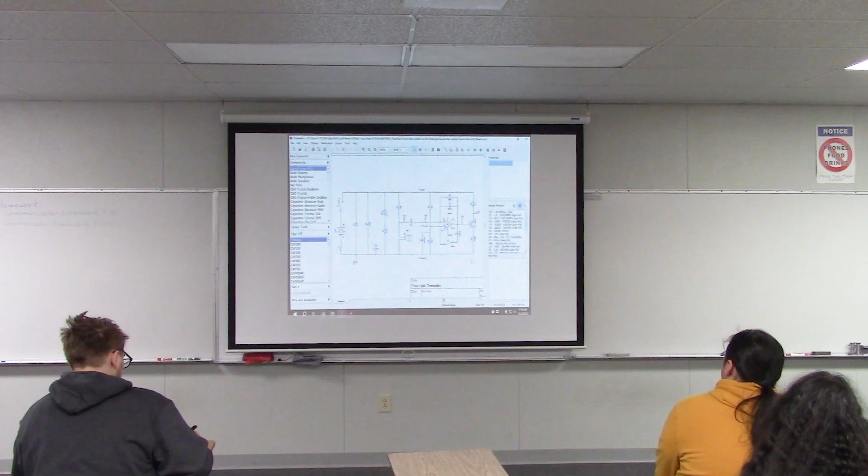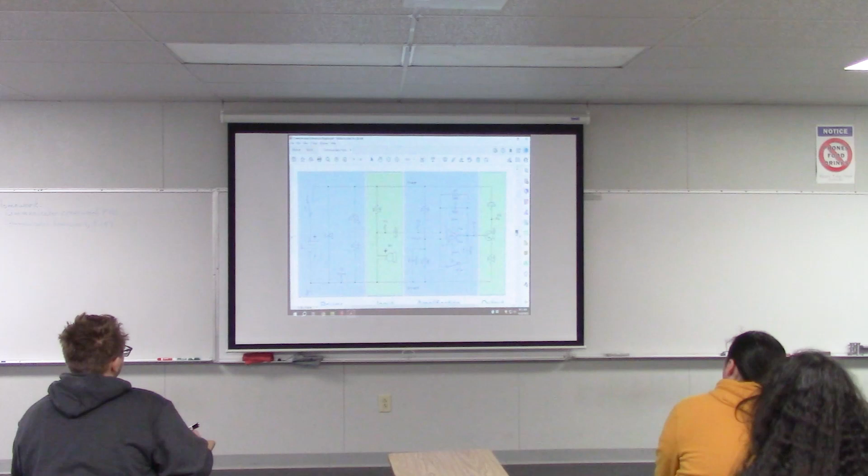So let's look at this. Let's break this down into stages. So this is the same circuit, but now it has been separated into stages. Okay, so you can see that there are 4 main stages here. And if we break them down like this, hopefully it's a little bit clearer what's going on. So we have the power stage, the input stage, the amplification stage, and the output stage. So we'll just do kind of a quick overview of each one, and then we'll dive in and see how each one works a little bit more.

Okay? So the power stage, oh, there you go. If you get them too close together, they have a little feedback there.

The power stage provides power for the whole circuit. The input stage takes the stimulus from the outside world and turns it into an electrical signal. The amplification stage takes a small electrical signal and makes it bigger. And then the output stage takes that electrical signal and turns it into some other type of signal or energy that is leaving the board. In this case, it turns it into light, which shines down the fiber optic cable and ends up at the other board. So this board really has these 4 different sections. The circuit has these 4 different sections that work together in order to achieve its goal.

So does that kind of make sense, how we break it down? All right, so then let's take a look at each one of these sections with a little bit more depth, a little bit more detail to understand how it works. Let's start with the power stage. So the power stage has this component over here. What do you suppose that component is? Yeah, the power supply, and in this case, what's providing the power for this device? Battery. The battery, exactly. So this is the battery over here.

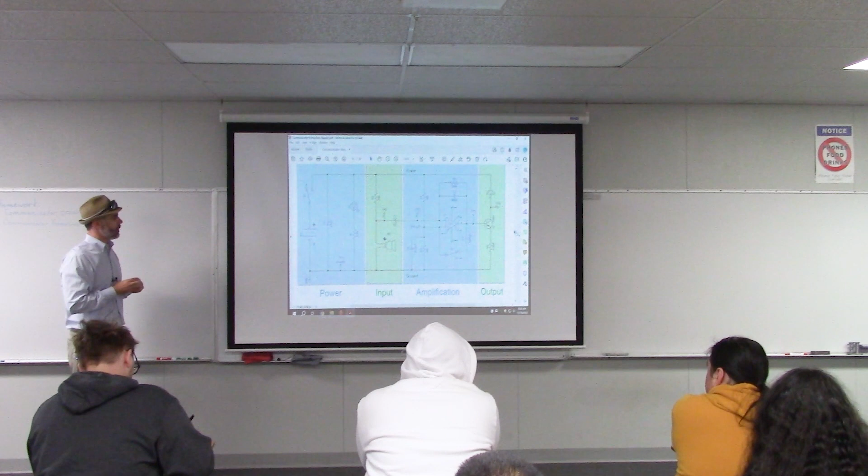So that's the power stage, and next up we have the input stage here. So the input stage, like I said, takes the stimulus from the outside world and turns it into an electrical signal. So in this case, the stimulus is sound. We're speaking into the microphone, and we'd like to turn that sound into an electrical signal.

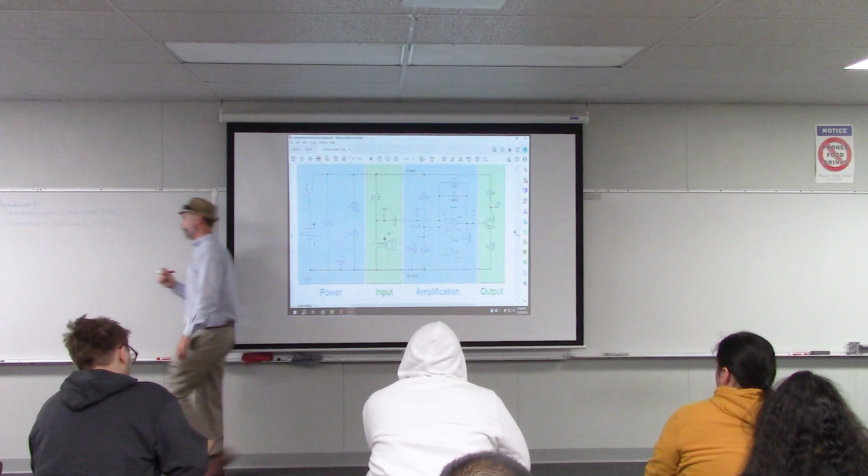So the way that this works is that this microphone acts kind of like a variable resistor. And when we speak into the microphone, the louder the sound is that hits the microphone, the more that resistance changes. So we can see that that microphone is in series with another resistor. So what we have is one fixed resistor up here, which is 20 kiloohms. And then we have the microphone down here, which acts like a variable resistor.

What's its range of resistance? It centers around about 20 kiloohms, and then it goes maybe between, say, 18 and 22 kiloohms, something like that. So let's say that this top part is connected to the 9-volt wire up here, sometimes called a rail. So we have 9 volts at the top, and then this bottom part is connected to the ground rail down at the bottom. So that is at ground. Say that both of these resistors were at 20 kiloohms. What voltage would we have right here in the middle?

Well, so what was another name for a circuit that had two resistors in series like this? A voltage divider, exactly. And we call it a voltage divider because it divides the voltage. And if both of the resistors are the same value, they each get half of the total voltage. So we've got 9 volts total, so what's half of that? 4.5, exactly. So the voltage in the middle would be about 4.5 volts.

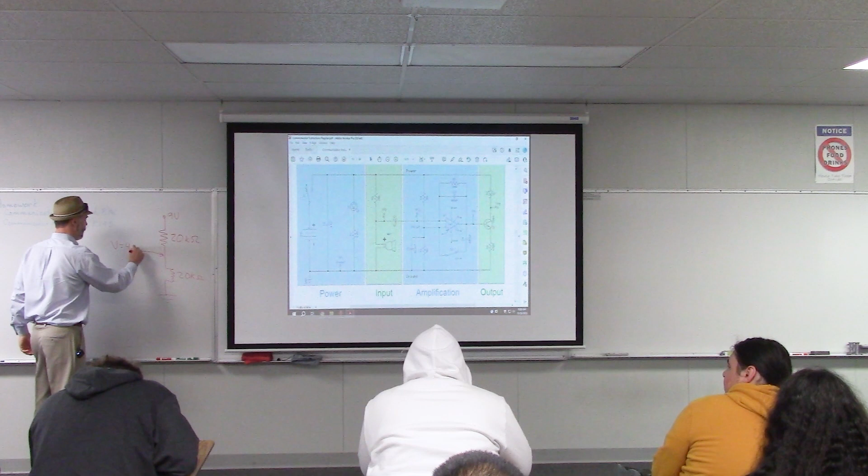Wouldn't the voltage also be in a range? Because that's variable. Well, right, exactly. So if this was at exactly 20K, then the voltage would be at 4.5. But if this goes slightly above 20 kiloohms, like you said, it causes this voltage to go up a little bit. And if this goes below 20 kiloohms, it causes this voltage to go down.

And that's exactly how we turn the sound signal into an electrical signal. As we speak, we cause this resistance to shift up and down, and that causes the voltage to shift up and down as well. And so that turns sound into a voltage signal. And that's the signal that we get right here at this point, which is right between those two components. So does that make sense? So that's how we are able to turn the sound signal into a voltage signal.

So in this scenario, is 20 kiloohms for the variable resistor like the sound system being off? Like nothing's being sent through? Right. When no sound is hitting the microphone, this voltage is at just a steady 4.5 volts. Okay, then what is the difference in speaking that makes it go down or up? Is it certain frequencies of your voice, or how loud? Like if you're being really quiet, does it go down? Right. So that's a great question.

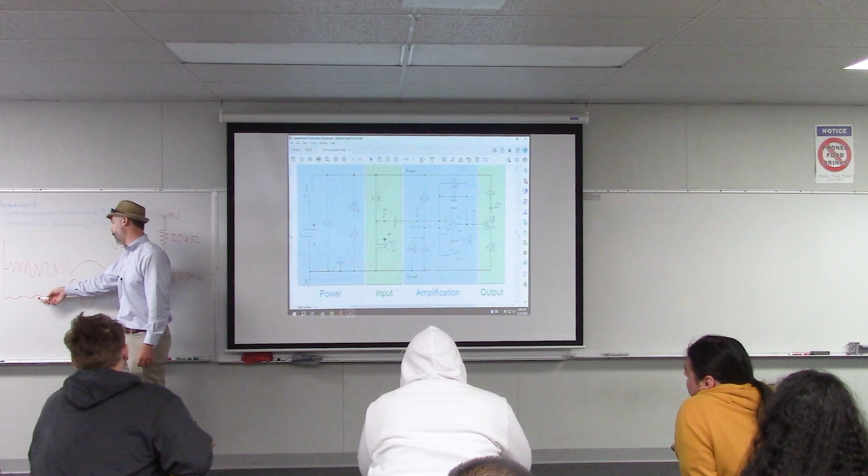So where's the 4.5 divided in that area, in theory? Because something has to be cut out, right? Some level of loudness or frequency has to not be picked up. Is that right? Well, okay, so what happens is that we have a voltage that changes over time, and it is centered around 4.5 volts.

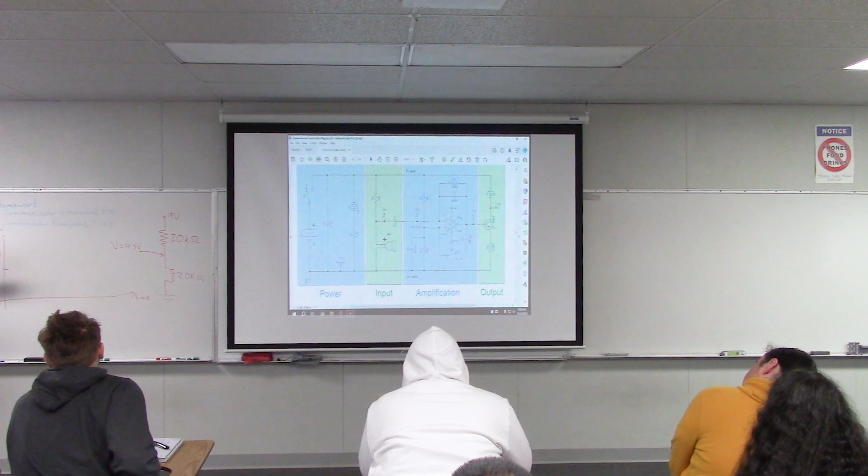So when no sound is hitting this microphone, we would see just a constant signal at 4.5 volts. When a quiet sound starts to hit it, we would see the signal go up and down a little bit. And then when a loud sound hits it, the signal might go up and down more, like that. Okay.

And that's why we have the signal centered at 4.5 volts. If we had it centered at 0 volts and we were trying to record signals, we'd get maybe the top part of the signal, but half of it would be cut off. So we have it centered right in the middle of our voltage range so that we can get the high pressure and the low pressure parts.

And then it kind of has like invisible dotted lines where the top and the bottom of what it can pick up is, right? Like the 22 and the 18K resistor levels. Right. So I'm making this bigger so that it's easier to see, but that's a good point.

The signal coming out of this microphone is actually very, very small. So if we said that this is 9 volts up here and this is ground and that's 4.5 in the middle, then the signal coming out of the microphone might be mostly constant, and then it might go up and down a little bit, and that might be a big signal. Smaller signals you couldn't even see. It's very small. It looks almost like a straight line, and we can see this when you build your board.

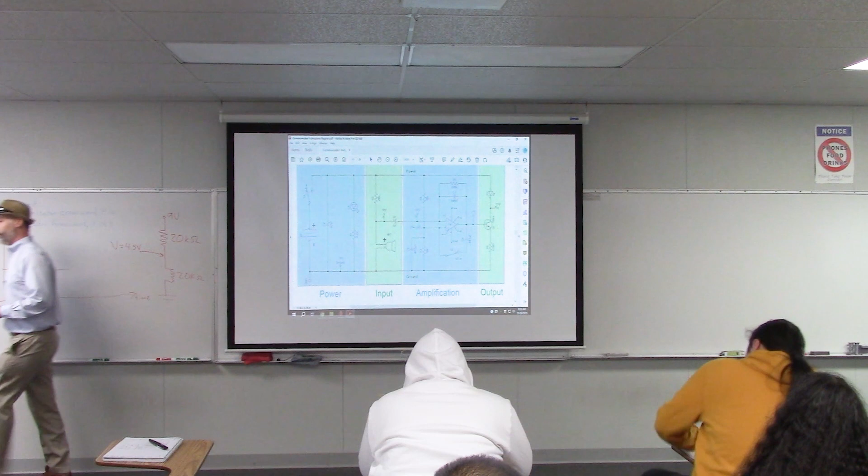You'll notice that at a number of different points on this board, there are these little things labeled TP. TP stands for test point. Those are points where you can hook up your oscilloscope and actually measure the signal. There's a test point right here between the microphone and the resistor, so you can measure the signal at that point to see what it looks like. I recommend that you do that after you build your board.

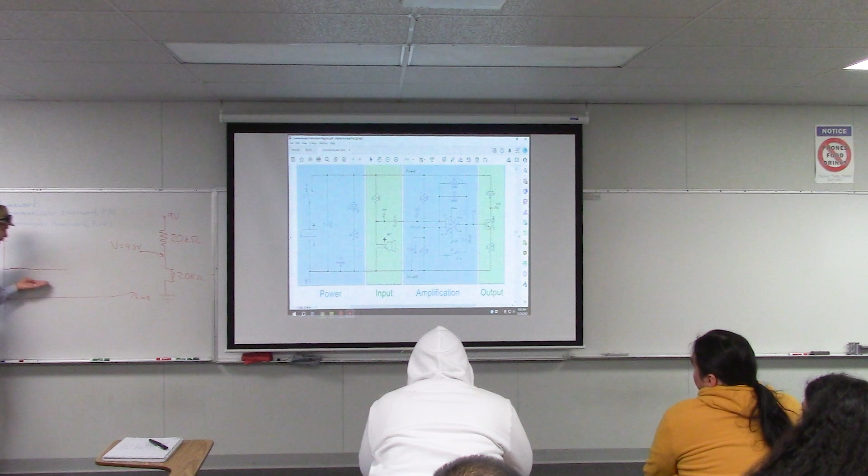So anyway, this is how we create the electrical signal from the sound, and this is what the signal might look like. But as I said, this is a very small signal. It's not really big enough to do anything useful. So the next thing that we want to do is make it bigger. But actually, before we get there, there's one more thing, and that's this capacitor here.

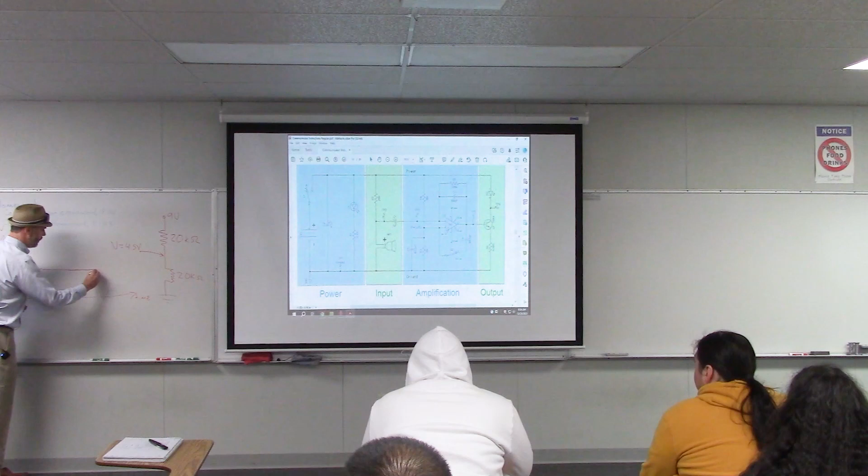Capacitors allow high-frequency signals to pass through them, but they block out or absorb lower frequency signals. The reason for that is because, like I said, when there is no sound hitting this microphone, the voltage is constant at 4.5 volts. We don't really care exactly what the voltage level is at that point. All we really care about are these little variations in the voltage, because those little variations are the sound.

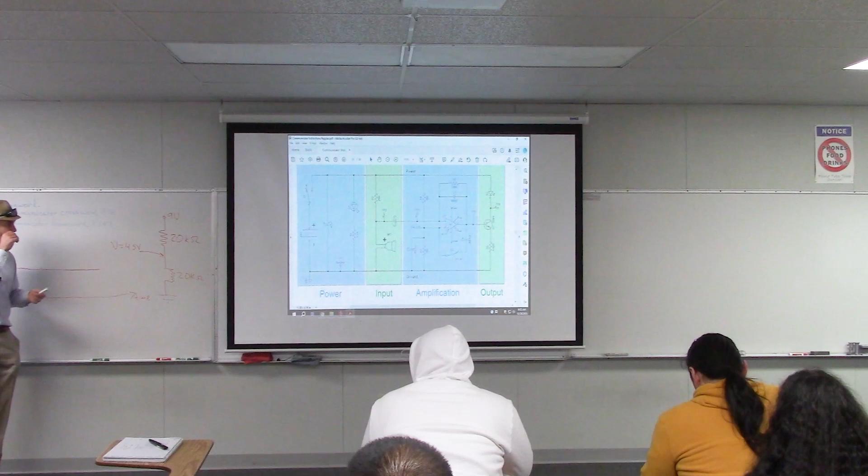A constant signal that doesn't change has the lowest frequency of all. We say that a constant signal has a frequency of 0 hertz. It never changes. So if we want to get rid of that constant, unchanging part of the signal, we can use a capacitor because it blocks out low frequency signals. This capacitor allows the high frequency sound signal to get through, but blocks that low frequency constant signal we don't care about. So that's what that capacitor is for.

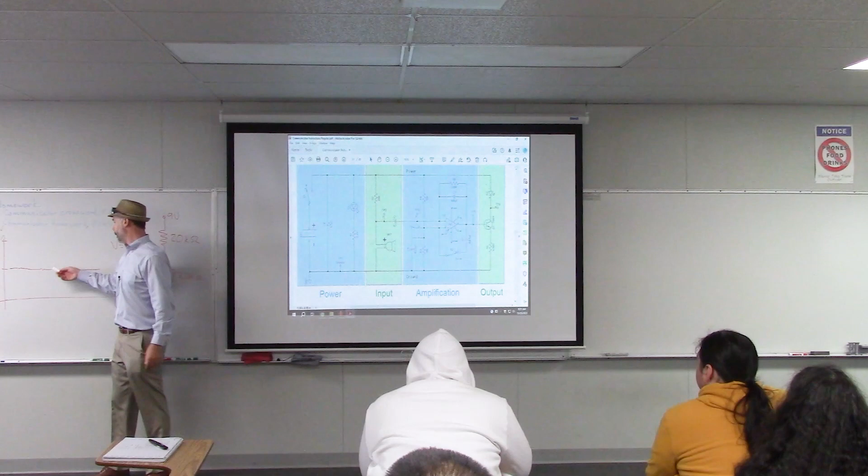All right, so then we go on to the amplification stage to take that small sound signal and make it bigger so that we can do something useful with it. This is the amplification stage right here. The main thing doing most of the work is this thing in the middle, labeled 741. That is an op-amp, an operational amplifier. It's a little chip designed specifically to amplify signals.

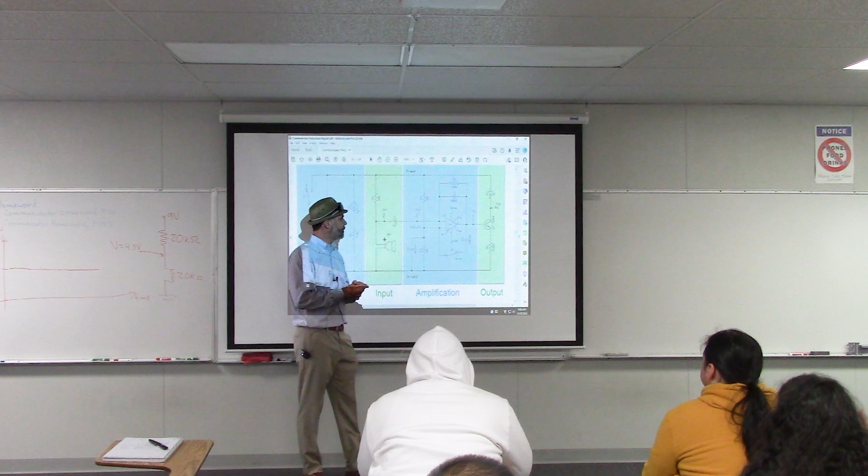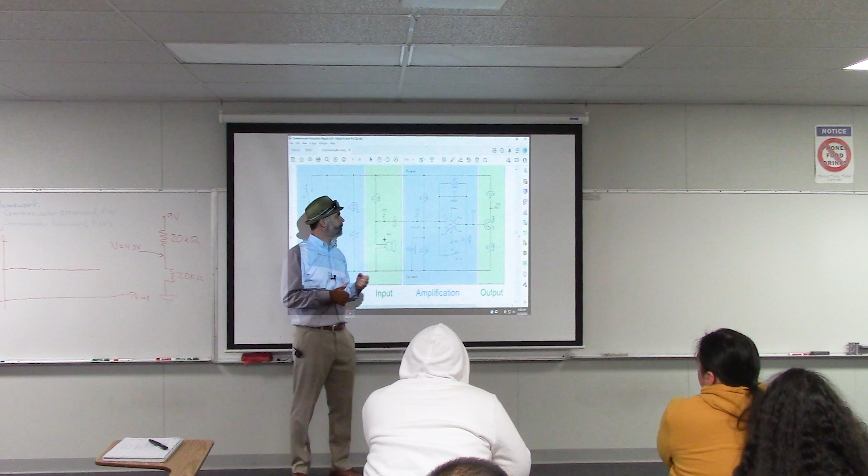The amount of amplification it provides is determined by the components you put around it and the way you put those together. We'll talk more about op-amps and what circuits we can make with them later in the semester. But for right now, the important thing is that this op-amp is providing a gain of about, I think, 200. That means the signal going out is about 200 times bigger than the signal coming in. What was the full name of op-amp again? Operational amplifier.

Yeah, we'll learn about them more later in the semester. They're really versatile chips. You can use this one chip to create lots of different types of amplifiers. But for right now, this just provides an amplification to our small signal. So we get the small signal coming in, we amplify it, and we get a bigger version of the signal going out.

Are we going to be making this whole then? Or make part of it? Well, you are going to solder all of the components into this circuit board. So the circuit board has already been created for you, and the circuit board essentially provides all of the connections. All of those connections are etched into a copper layer to create essentially little wires on the surface of this board that provide all of the connections between the different parts. So what you will all have to do is solder the parts into the little holes and spaces that are provided. And then once you do that, the other connections will be made by the board.

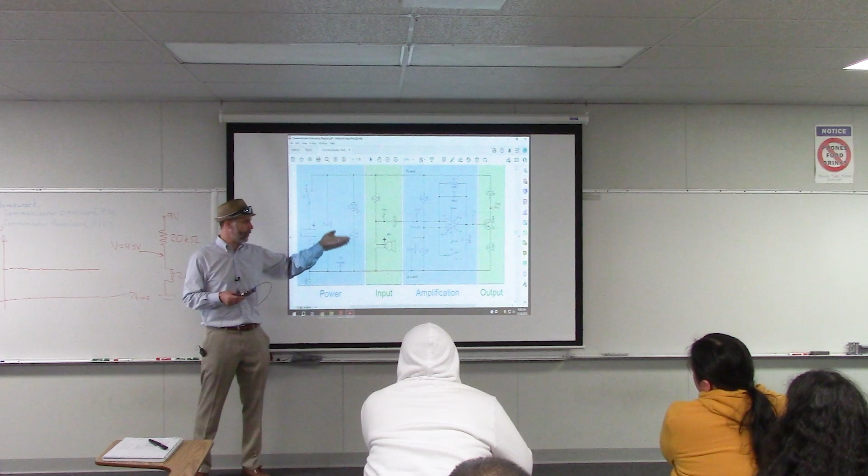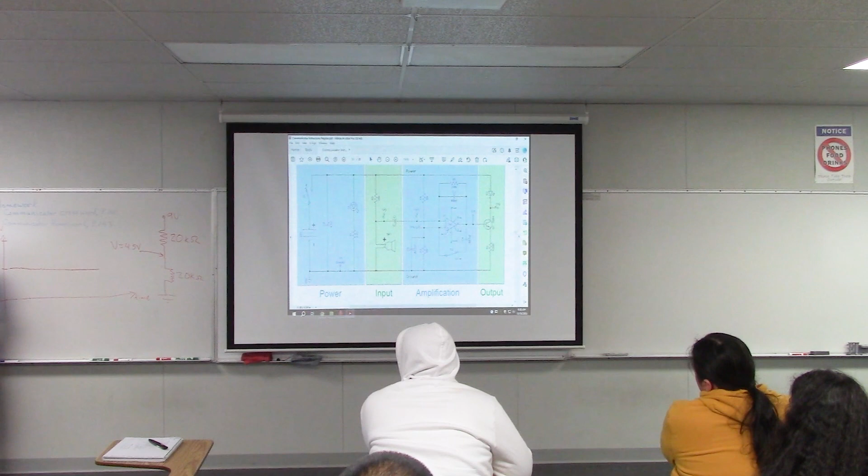Does each person work on their own? Yes. And these will be yours to keep when you're done.

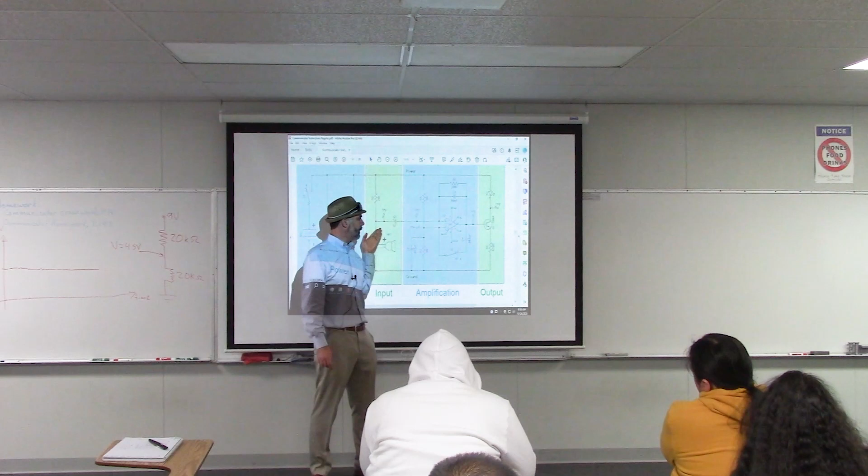The one other thing that I wanted to point out about the amplification stage is that it has this other switch in there. And this other switch is a switch for a test mode. So when the switch is in one position, this amplifier acts normally, and it just takes the small signal coming in and makes it bigger. When the switch is in the other position, it creates a test tone. It's a large oscillating signal that gets sent out through the fiber optic cable.

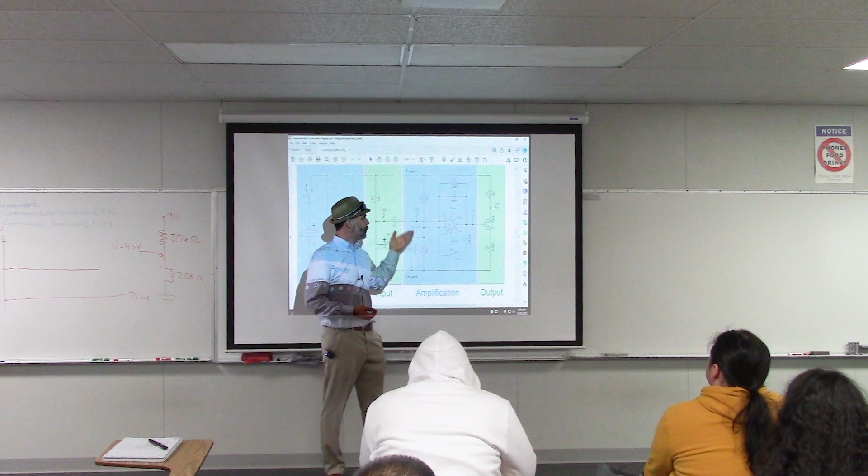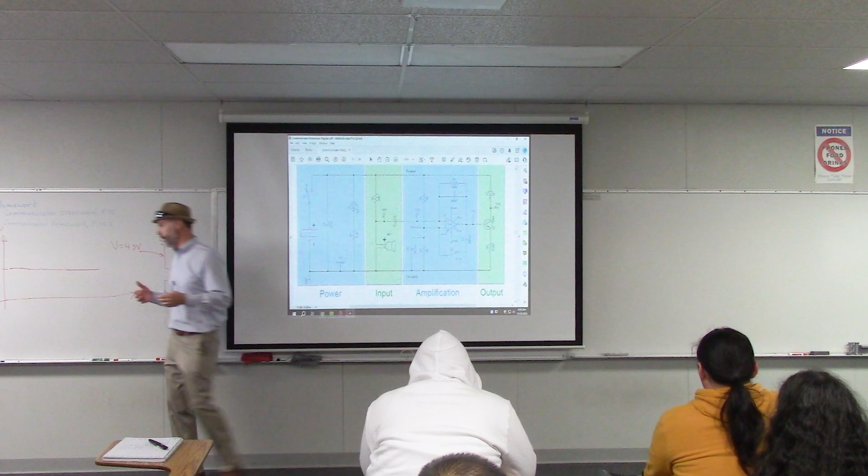And this is useful for a couple of things. First of all, it can demonstrate that at least the amplifier part of this board is working. And it can also be used to create that large signal that can be used to test out the fiber optic receiver. So let me show you what that is. It's a really loud, annoying screech is what it is, okay?

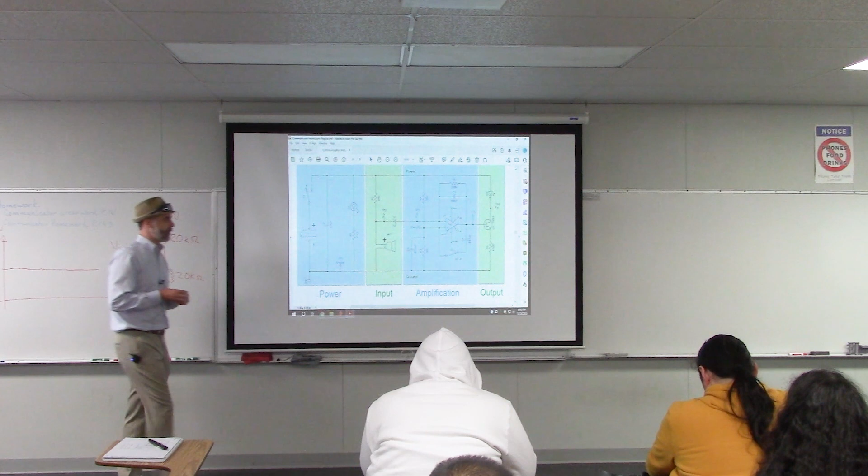So we turn this on, and then this switch up here is the test mode switch. So yeah, it makes that awful screeching sound, okay? And it sounds really bad, but it's actually very helpful. It's a large signal that's easy to see and easily verifiable. So that's why we have that there. That's what that switch is. It's a test mode switch. So any questions about the amplification stage?

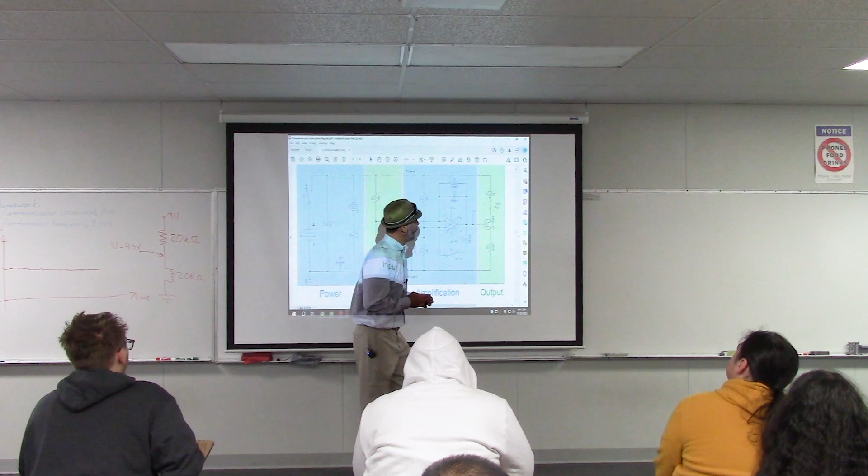Okay. And then finally, we have the output stage. The output stage takes the electrical signal and turns it into some other type of energy that gets put out from the board. In this case, we're turning it into light that we can shine down the fiber optic cable. So the way that this works is that we have this little LED up here, and that LED represents the little light that shines down the fiber optic cable.

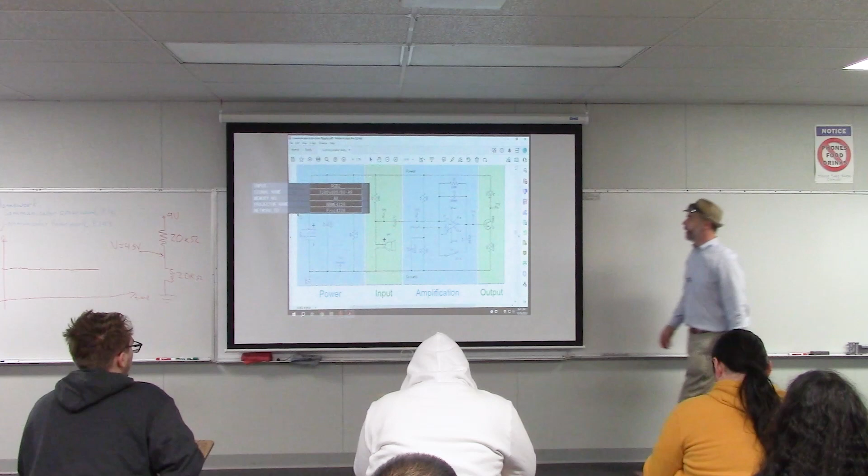Okay, and then we have this component, and this is called a transistor. A transistor acts like a sort of a dimmer switch that is controlled by an electrical signal. So we have this electrical signal coming in, which is our amplified sound signal, and then it's connected to this dimmer switch. So when the signal goes up, it makes the light brighter. When the signal goes down, it makes the light dimmer.

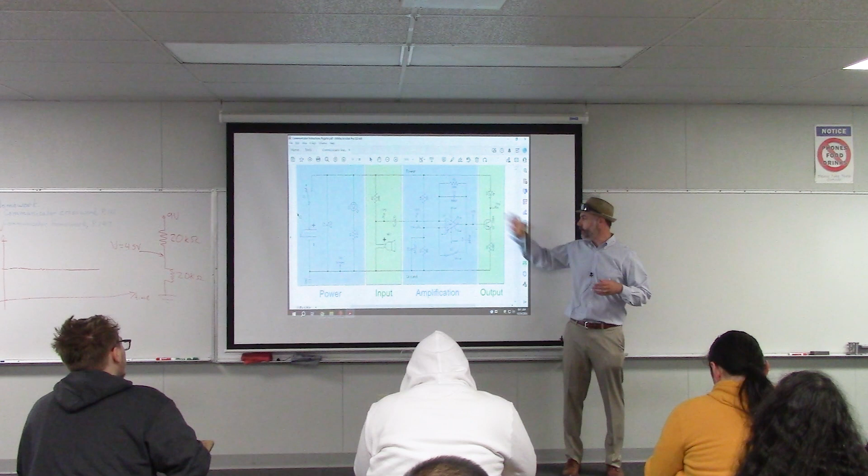So when the signal varies quickly with the sound, it makes this light brighter and dimmer and brighter and dimmer, and that shines down the cable, and that's our signal that we're sending to the other board. So that's how the output stage works. Any questions about that? And we have another board that we're gonna have to do, right? Yeah, so this is all the circuit on the transmitter board. We have another circuit on the receiver board, and we'll talk about that next time.

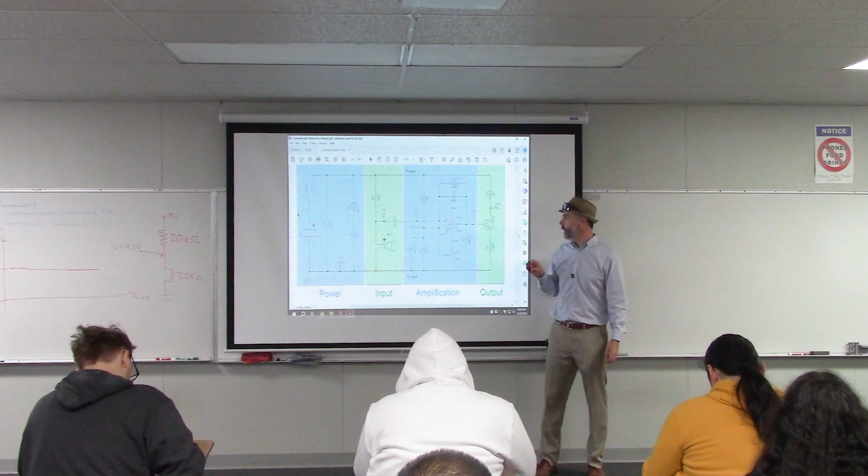So are we supposed to finish all of this today? No, you don't have to. What we're going to do is we're going to have 4 classes to work on this all together, to work on 2 boards. We want to give you that time to work on these because we want you to really do a good job and make these look nice and clean. Because like I said, these can be tools to help you get jobs out in the real world. So we want you to take your time and really do a good job on these.

So you will have the lab periods today and then for the next 3 classes as well to work on these 2 boards. Yes? Is there a place for us to review this layout in case we're trying to reference it while we're building? Yes. So this is part of the fiber optic communicator PDF. I'm going to go through that in just a minute when we do our lab preview. And that's available on Canvas, and you'll be able to see that. Other questions?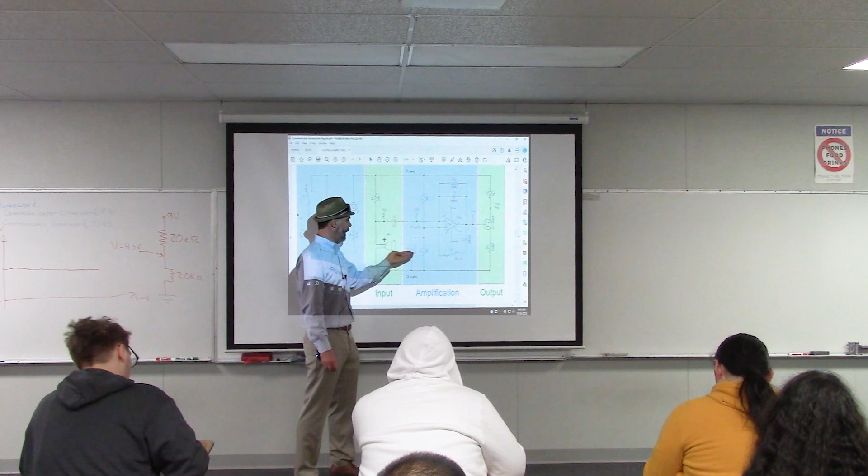In the amplification stage, are the 10 kilo ohm resistors meant to regulate the voltage going into the op amp? Kind of. So you have two 10 kilo ohm resistors in series. So again, they act like a voltage divider. And you have this capacitor in parallel with that resistor, which helps to stabilize that voltage at this point. So really, what they're doing is creating a stable voltage of 4.5 volts at this point right here, which is connected to one of the inputs of the op amp.

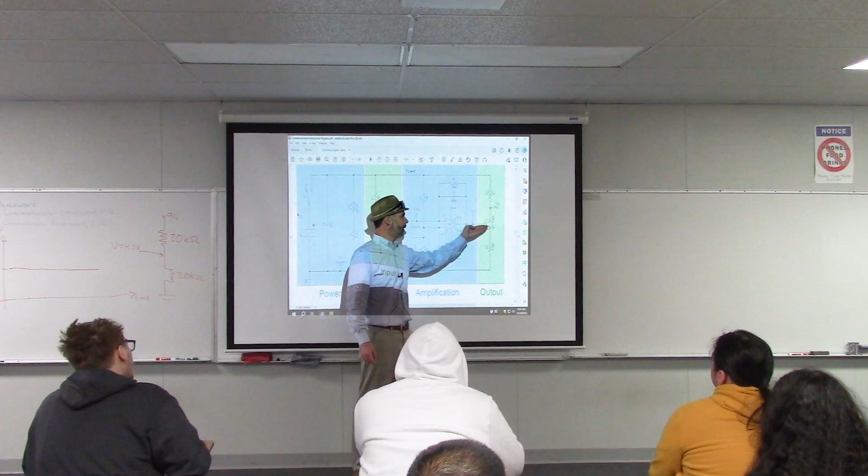And then the op amp is really amplifying the difference between the incoming signal here and that voltage there. So it's not using it as power, it's using it as a reference voltage? Exactly, it's a reference voltage. Thank you. Sorry, one last one. The transistor, what does it do at the output stage? So it acts like a dimmer switch that's controlled by an electrical signal. So it brightens or dims this LED up there.

Now, talking about power for the op amp, there is actually a power input and a ground input to the chip here. And on the diagram, you don't see the wires actually going all the way up to the power rail or down to the ground rail, but they are labeled power and ground. This is a convention in circuit diagrams, especially when they get more complicated. It would be confusing to draw the wires from where they start to where they need to be, because we'd have to draw it across the capacitor and the resistor, and it would get in the way.

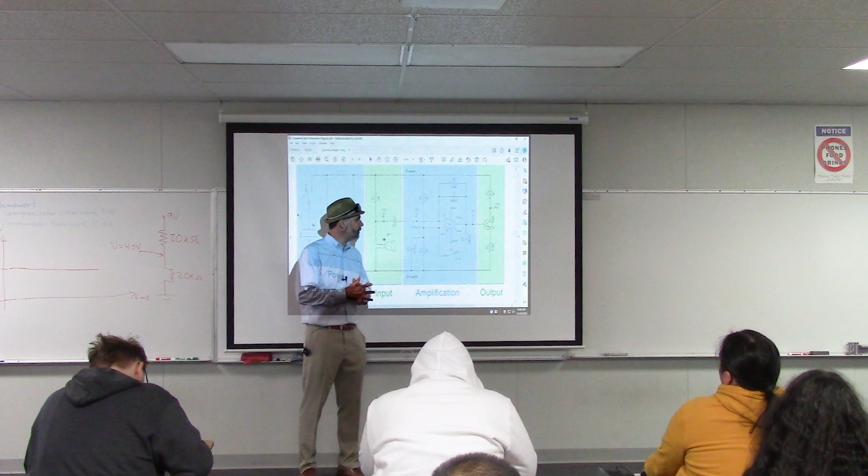So sometimes instead of drawing the wire all the way, it gets drawn part way, and then the label is applied to that wire. So when this one is labeled power, it indicates that it's connected to the power rail up there. And this one is labeled ground, it's connected to the ground wire down there. So the op amp is getting power and ground, even though we don't see the wires extending all the way. So, any questions about that?

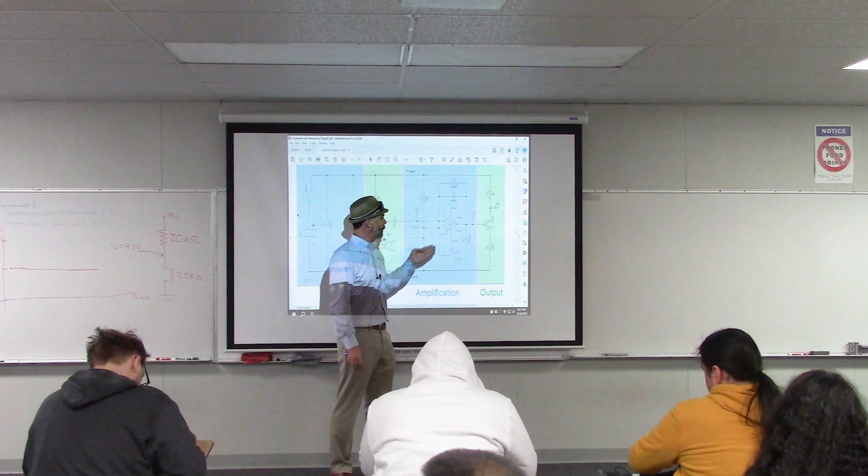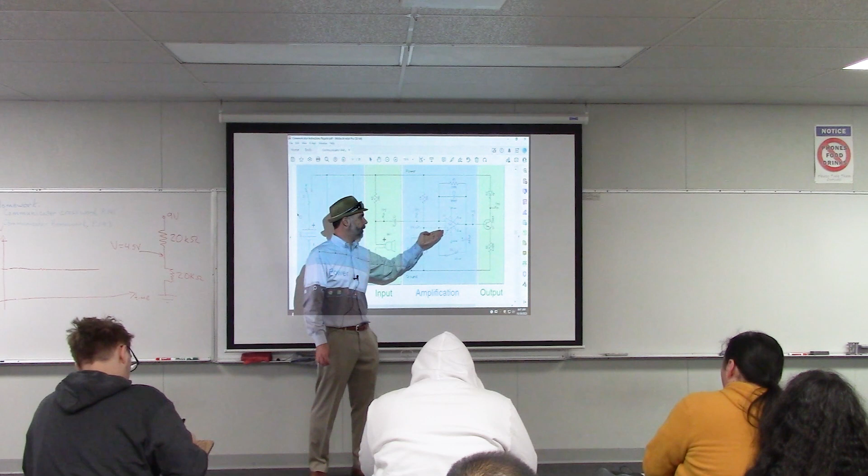What's the purpose of the 200 kilo ohm resistor in series with the capacitor? So these components determine how much amplification the op amp provides. Choosing different components would result in different amounts of amplification. And we'll talk more about that later in the semester when we go into some of the different types of circuits that you can make with an op amp chip. Other questions?

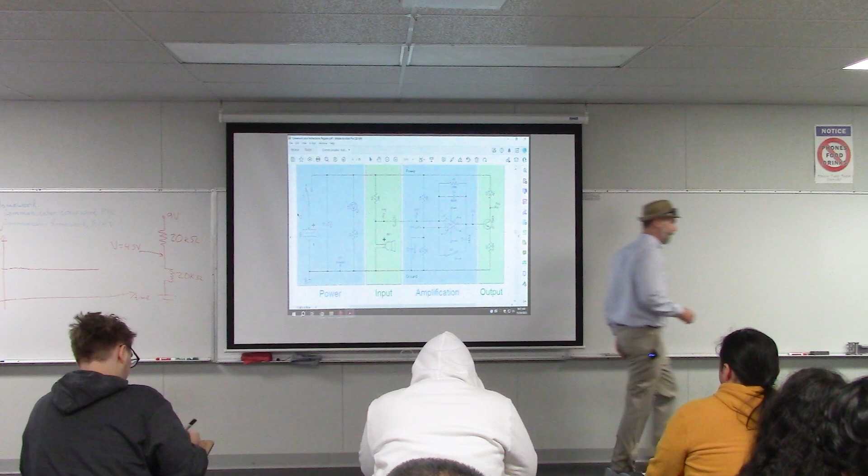Okay. All right, then let's get into the lab preview, and talk about how we're actually going to put these boards together. Everybody is going to get a kit that looks like this, with all of the parts inside. It's got 2 boards that look similar to each other. The way to tell them apart is to flip them over. This one says transmitter, the other one says receiver. So this is the transmitter, and this is the receiver. Today we're going to be working on the transmitter.

So on Canvas, you will find a link to the instructions. If you go to assignments, you can search for transmitter. You click on the fiber optic transmitter. This will have a link to the communicator instructions. You can download that, and that's what I'm going to go through right now. So the instructions.

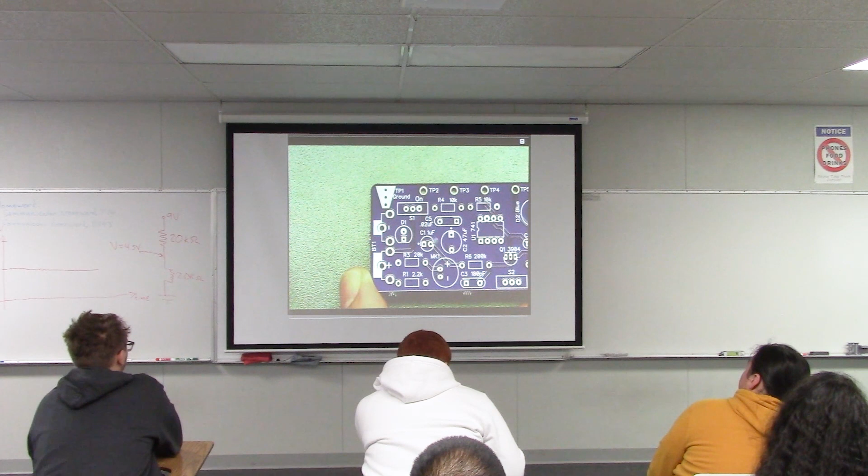So when you go to solder these into the board, you might be soldering it into this hole, for instance. You can see that this is labeled C for capacitor. This is C2. And you can see that one of the holes is labeled with a little plus sign for positive. So you would solder the positive leg of the capacitor into the hole with the plus sign. You would solder the negative leg of the capacitor into the other hole. So any one of these round electrolytic capacitor places has a positive side labeled. Okay, so make sure you solder those capacitors in the correct orientation.

You can use tape to hold the larger components in place. So we will have some masking tape over there, and sometimes that can help to hold in the larger capacitors and things like that.

You need to solder the socket into the board and not the chip. So we talked about that little op amp chip. You do not solder the op amp into the board. The reason for this is because the op amps can blow out, or they can go bad. And they have 8 legs on them, and it's a real hassle to try and desolder 8 different things at the same time. So instead of soldering the chip directly into the board, we have this little socket that you can use. So what you do is you solder the socket into the board, and then you just push the chip into the socket. That way, if the chip goes bad, you can just pull it out and pop in a new one, okay? So let me show you that.

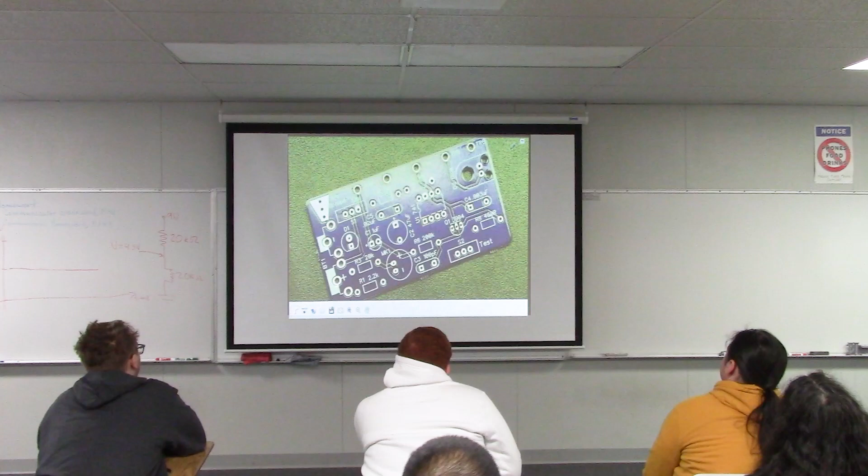So this is the spot. This is the spot right there where the chip is going to go. You see it's labeled 741. You're going to solder this thing into the board. This is a socket. So you can see it's got little legs that stick out the bottom, and it's got little holes on the top. So you're going to solder this socket into the board, and then after that's soldered in, you're going to take this chip that looks like this, and you're just going to push the legs of the chip into those little holes on the top of the socket, okay? Again, that way if anything goes wrong with the chip, you can just pull it out and pop in a new one, okay?

The other thing to be aware of is that this chip has an orientation that it needs to go in. So if you look at the board, you can see that there's this little U-shaped indentation on one side of the marking. Everybody see that little U? Yeah.

On the socket, you can see that the socket has its own little U-shaped indentation. So you would line up that U-shaped indentation on the socket with the U-shape on the board. And then the chip also has a little marking. So with the chip, it's this little circle. So you see this little circle there.

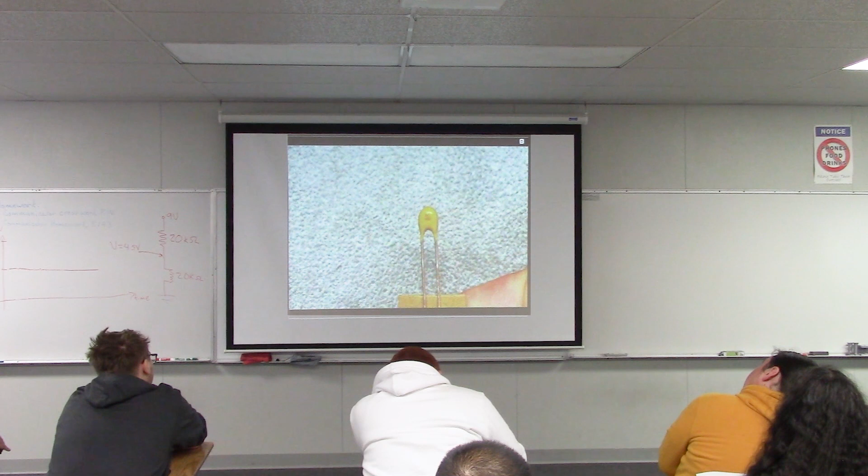So this is an example of a capacitor. And this one has writing on it, but again, it's just very, very small, so it's very hard to read. So if you look closely, you can see that says 332. So that code would be 332.

So if we came back here, that would be a 332. So I think that one might be used in place of the 302. So anyway, that should be fine. But you're going to be looking for those little tiny codes on there to tell you which type of capacitor to use. Okay, so that's what you're going to be looking for.

So that's all that I wanted to say about assembling this. Oh, one other thing. There's a microphone for this board. So the microphone receives the signal. This is a very small microphone. It's called an electret microphone. And this is what the microphone looks like.

Okay, you can see that it has two wires that are sticking out of the bottom. Well, it's kind of hard to see from that angle. It has these two wires that are sticking out of the bottom, and they're not exactly centered in the case. So they're kind of on one side of the case.

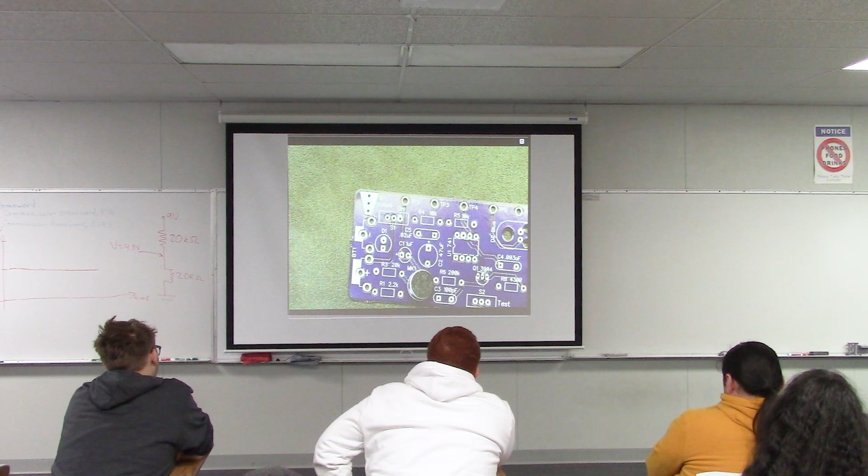And the same thing for the transistor. You can see that the transistor is kind of in a D shape, and you're going to just put it in so that the body of the transistor lines up with the D-shaped outline there, and then everything will be fine.

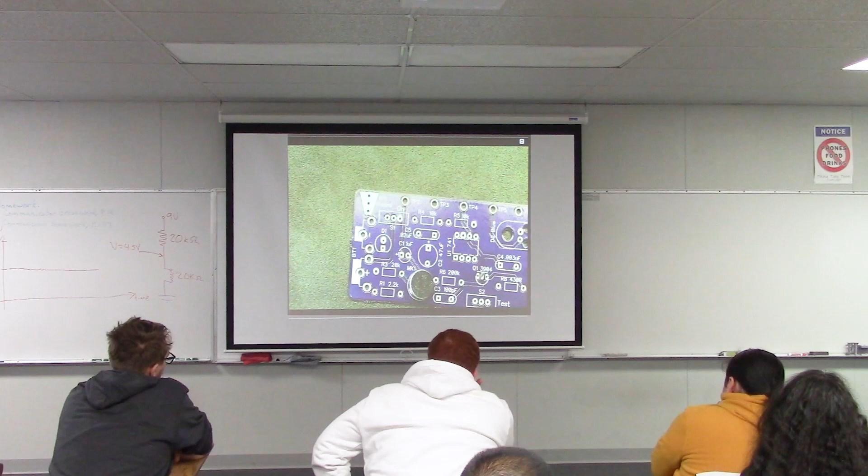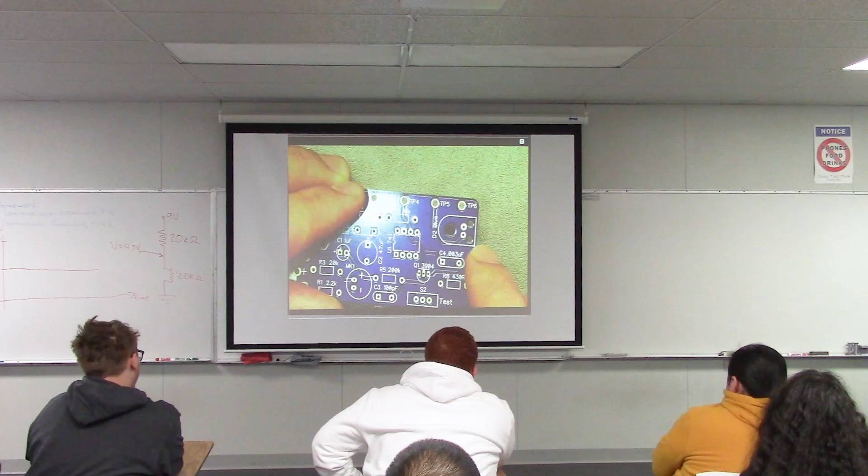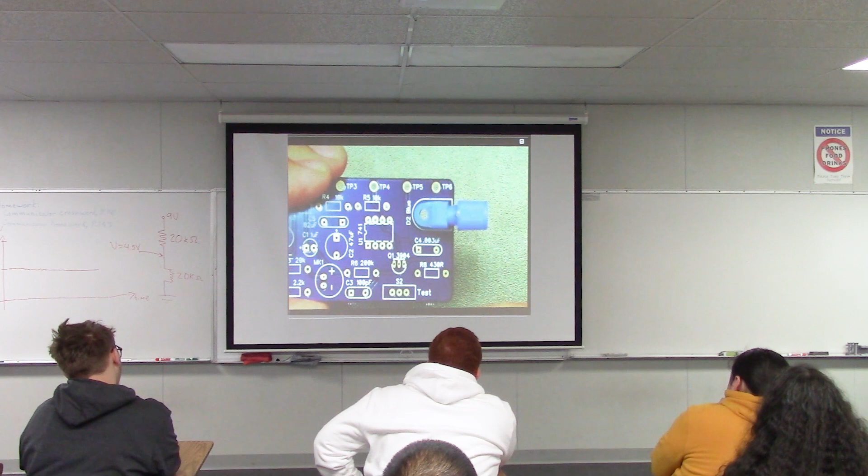Oh, actually one more thing. It says to use the blue fiber optic holder that contains the infrared LED. So over here, this spot up here is the spot for the fiber optic transmitter LED. That is this thing right here. So this thing just fits down with the wires into those holes, and you're just going to solder it right onto the board like that. You'll notice that this is the blue one, and the board is also labeled blue. So it's talking about the blue component here.

There is another very similar component. It's the same size and shape, but it is black, and we're going to use that for the receiver. So make sure that today when you're working on the transmitter, you use the blue one. Okay? If you solder in the other one, it will not work. All right, so you need to make sure that you use the blue one here, like it's labeled.

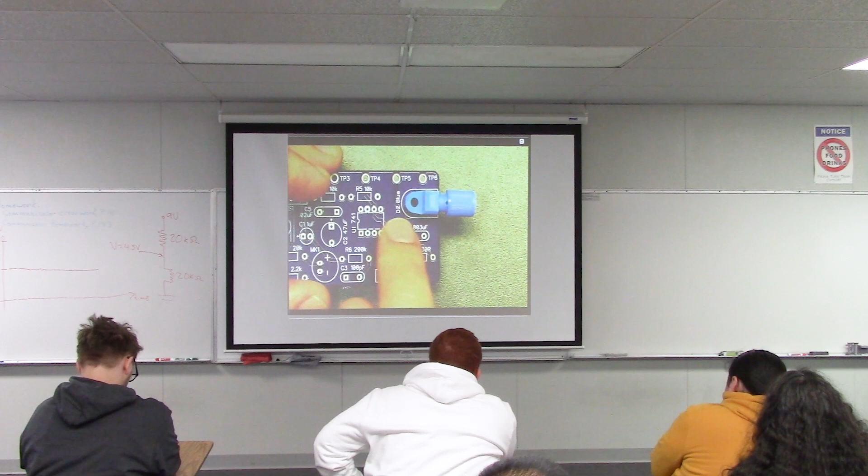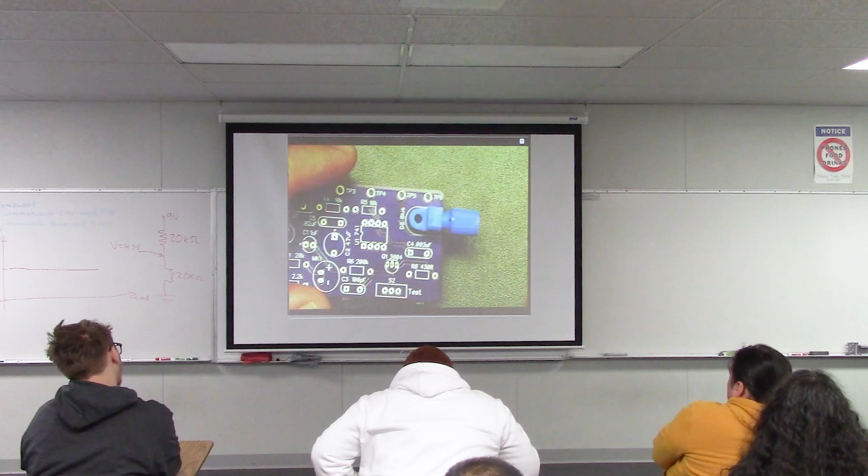What's that component called? This is the LED. Or, let's see what we call it, the fiber optic holder. So it's actually a couple of things combined. So in the middle, there's a little LED that points directly out there, but this blue plastic housing around it is actually a holder or a connector for the fiber optic cable.

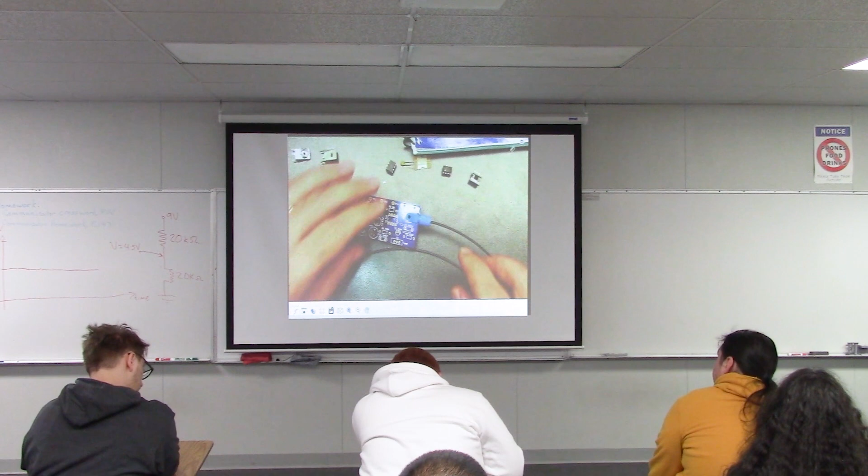So each kit will come with a fiber optic cable that looks like this. It's kind of this black cable, and when you've soldered everything together, you'll be able to take this cable and feed it into the holder. Then you can just twist the collar on the holder, and that'll secure the fiber optic cable in place. So this plastic piece provides the holder for the cable as well as the LED inside it.

Okay, and the black one is a receiver. So that's why they're not interchangeable. This blue one is an LED that creates the light. The black one is the receiver that picks up the light. So you can't just swap them out. So that's what's going on there. So any questions about that? All right, so that's what I wanted to say about the fiber optic transmitter.

So let me take attendance, and then I'll let you go.